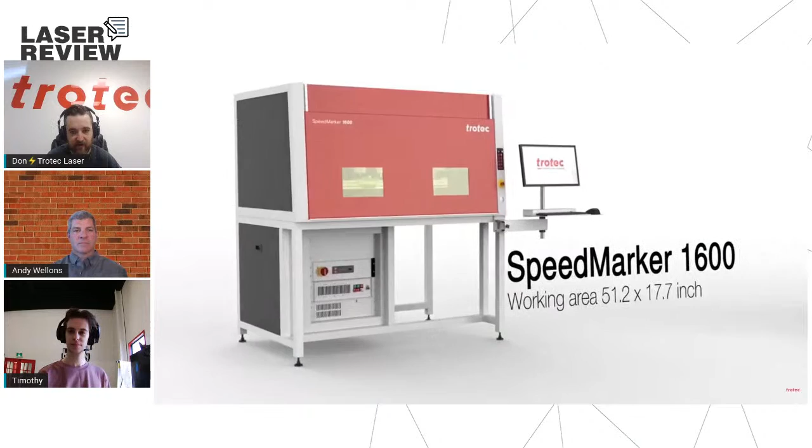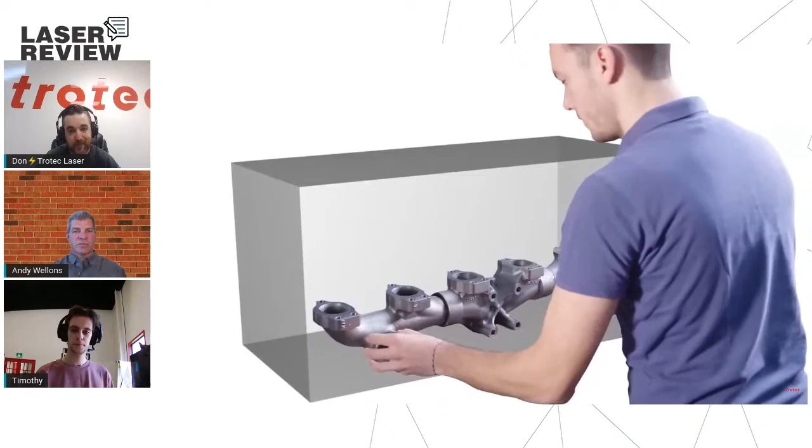Specifically in industrial type applications, so principally in fiber optics, kind of the metal marking sort of areas, I would guess. Yes, definitely. Anything from fully integrated systems to our standalone workstations. Oh, very cool. Have you gotten to be a part of some custom installations for Galvo machines and things? Yes, quite a few over the years, from simple to very sophisticated major inline marking.

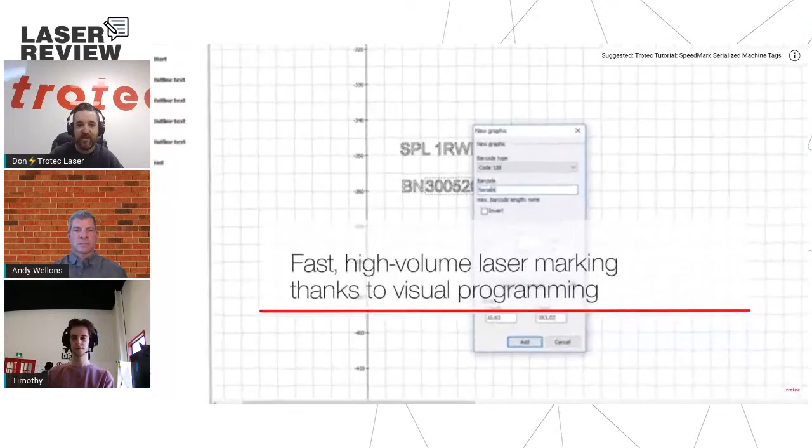Oh, that's cool. That's something I'd love to ask you more about. So this is something we don't often get to talk about, but the Galvo machines in particular have this great facility to be integrated into any number of different unique placements, and particularly, as you're seeing here on the screen, the Speedmark software is so flexible that it allows for all manner of different applications.

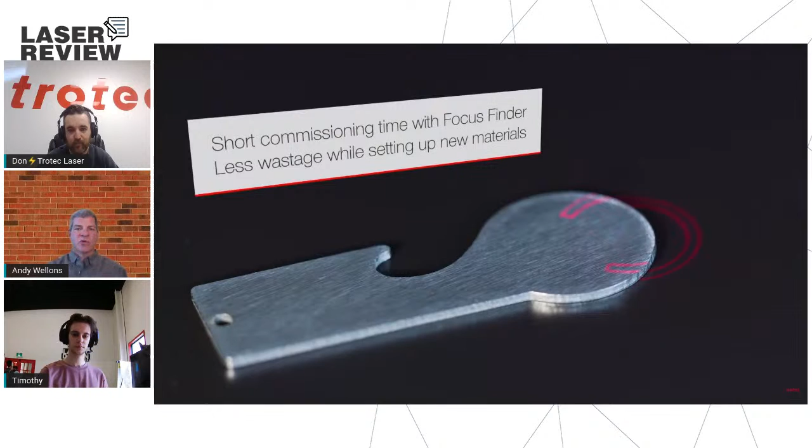I think you said specifically you were interested in industrial marking. Would it be the sort of things we're seeing here in the video, like barcode marking, scanning, that kind of thing? Yeah, definitely. Part identification and traceability has been a big part of that, and that can be anything from human readable part numbers on parts to 2D or QR codes that are read and then kept track of through the manufacturing process.

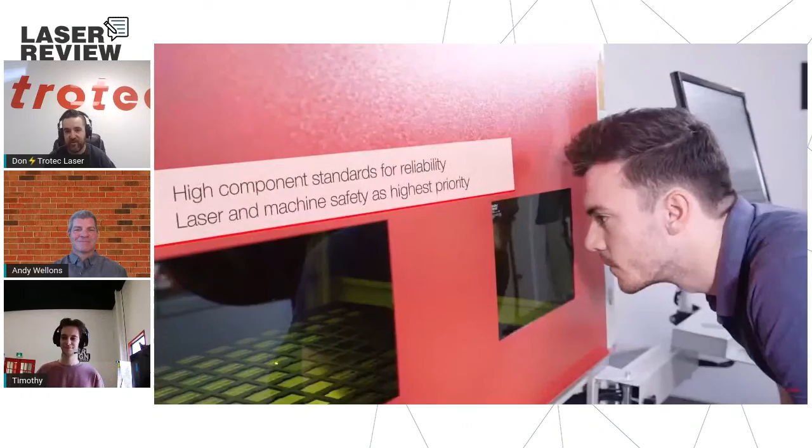Very cool. I was very fortunate this week to attend FabTech here in Toronto with Miguel, which is why I'm joining you once again from the Ontario office. We got to meet with a lot of great customers this week who do exactly what you're talking about, that traceability aspect. And it's still, when I think of industrial marking, my mind goes specifically towards a couple applications in particular. But the things people are doing these days with Galvos is so widespread and impressive.

I really have to redefine what I think of as a typical Galvo application. Tim actually is going to be doing some pretty cool stuff for us this morning. He's prepared something very interesting, I'll take the heat off of Andy really quick. Tim, do you want to show us a little bit of this? How do you want to go about this? Do you want to keep it a surprise?

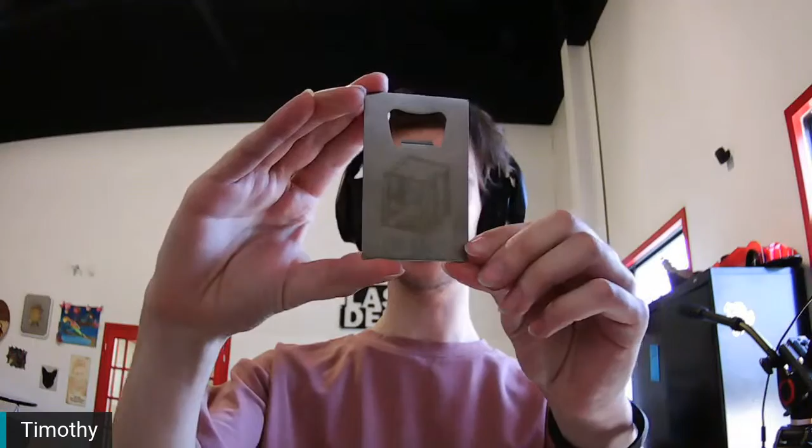I think what you have is really cool. I'll keep my own work as a surprise, but for now I'll showcase what I've been working on, just to show a bit of the Galvo's abilities. So here I have a black anodized aluminum card, just able to work with the Galvo on that. I'll be showcasing this today. The next thing we'll be showcasing is a bit of a fan favorite in my opinion, been taking it to a lot of shows - a little bottle opener with a blueprint of the Galvo machine. Love this one, everyone likes a beer opener. And then the third one's going to be a little surprise, a bit of a pattern, a bit psychedelic. I like it.

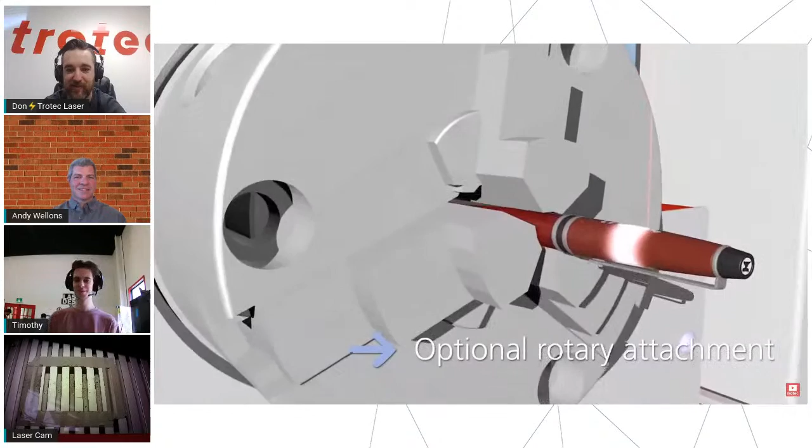I have to say, you joke about everyone loves a beer opener, but trying to keep those even in stock at a trade show was tricky. Yeah, I mean, I'll throw it to Andy, but it still blows me away. Even just getting to do pens in the speed marker for people at a trade show, it's incredible to see that personalization of a simple thing using this machine can bring about.

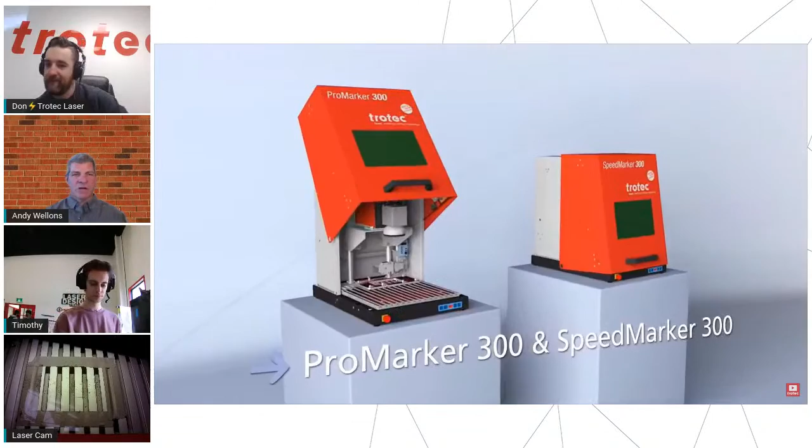Yeah, very impressive part of Galvo is the speed that it can mark - up to 10 times faster than a gantry flatbed system. So it can be very impressive to see personal identification that can be done in seconds. Can be very fast. Absolutely. I think people don't understand how fast, right up until we actually get to show it off.

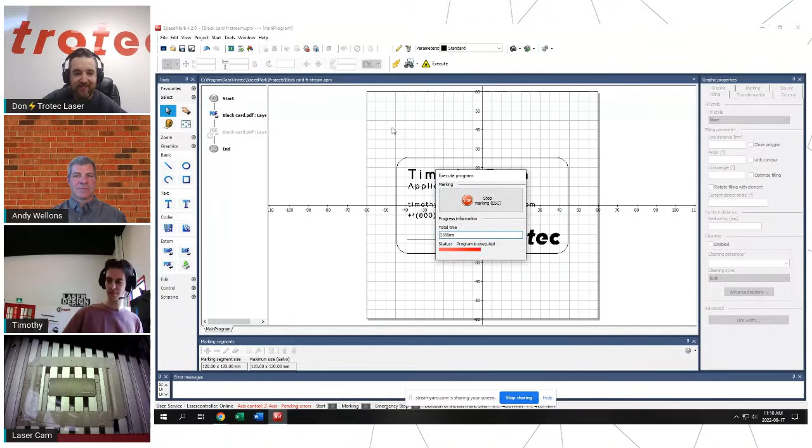So I'm going to have Tim get started on the marking. I have to say, I'm glad you're starting with something simple like the black anodized card, but don't think that just because it's simple, it won't be impressive. Oh yeah, definitely. I always tell people... so 10 times, you say, Andy. Wow, that's so cool, okay.

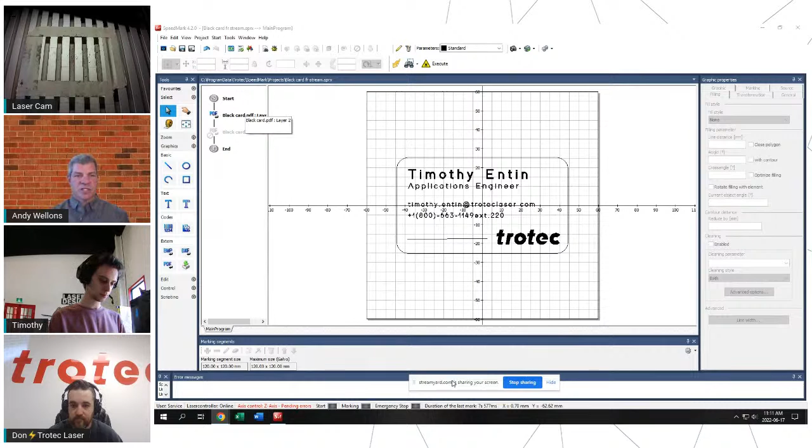And what we're seeing there on anodized, it can also be done with a CO2 laser because you're just removing the anodized surface from the aluminum. But with the fiber laser, which we're using at this time, a 20-watt fiber laser, it still removes the surface, but again, very much faster than a CO2 laser. And that's based on the wavelength of the laser, but also the method that the beam is moved with a galvanometer versus an XY movement. So a lot of advantage in certain areas.

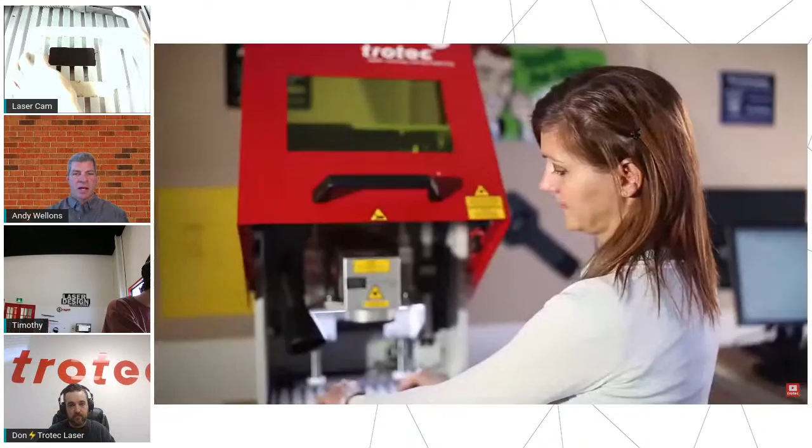Absolutely. I was going to ask, in your opinion, why would somebody interested in Trotec, but not sure where to begin, be looking at a Galvo laser as opposed to a CO2 or more of a flatbed system? For metal engraving, obviously with CO2, you can remove surface coatings like anodized paint. But as far as bare metal, say stainless steel, you would need to use a CerMark or some other type of material to get contrast on those base raw materials. With fiber laser, you can get contrast without any prep. So that would be one reason - if you need contrast, you can do that with a fiber laser without any prep. Also, as we mentioned, speed. A lot of industrial or personalization applications - if you need to do 10,000 pens and you can cut your time in half, it's a huge benefit.

Absolutely. But on the other hand, Galvo laser has a limited engraving area. It's a fixed head, so our standard lens is up to about 120 by 120 millimeter area. So if you need large pieces, sometimes the gantry or flatbed is still a great or better solution than Galvo. But whenever we're talking about a single piece that needs a quick or short cycle time, it's a big advantage.

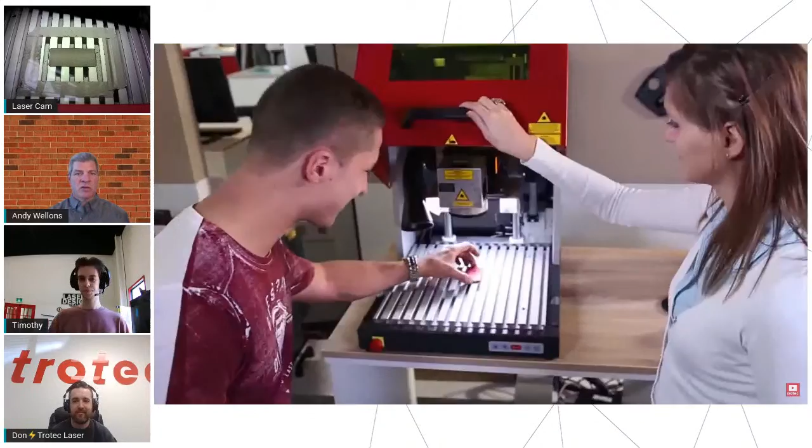I guess another thing to add would be very small, detailed engraving. With a Galvo laser, the beam diameter or spot size is considerably smaller than CO2. So you're able to engrave or mark very small, detailed graphics or characters with good legibility.

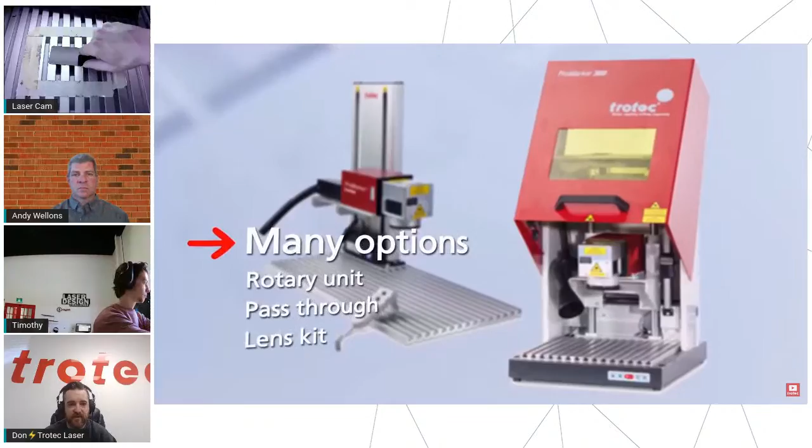Very, very true. And you could even see - Tim, I don't know if you can hold up that anodized card again to the camera - the quality of, as you pointed out, Andy, the quality of legibility and marking on that. There it is. Yes, always the toughest part of the stream. No, not at all. Yup.

Oh God, I don't know where it's going. It's all good, it's all good.

As you said, Andy, the level of legibility when it comes to on anodized, but then even as you showed on the bottle opener, Tim, directly onto an item like stainless steel - that is something that, by and large, when it comes to the flatbed systems, you struggle to mark. You can use CerMark or a marking compound like that, but it adds an extra step in production, or several extra steps that add to your production time and production difficulty, in terms of making sure you don't have overspray or that consistent level of CerMark on every piece. This solution adds a lot of ease to your production and takes a lot of stress off of your operators. It's just plug and play.

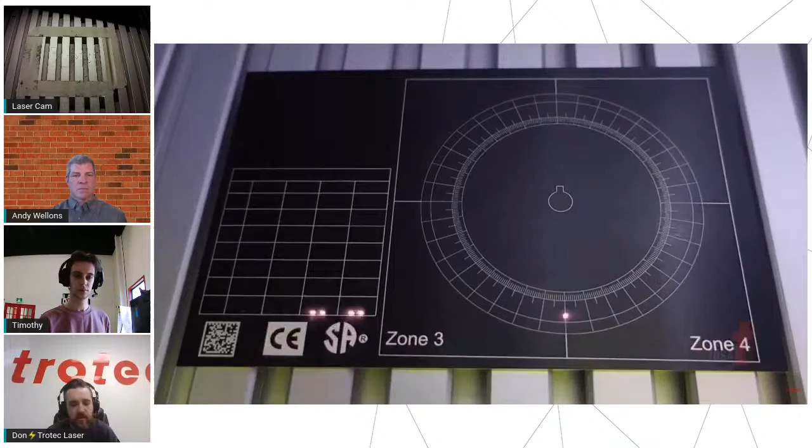One thing I wanted to ask you - when you install a Galvo, is the actual system entirely self-contained? It comes with the computer and everything, but do you need a separate Windows PC when you have the Galvo installed, or can you run it just with a screen? The systems do include the industrial PC in the workstations. There is an option to provide your own PC as well. You can use a laptop if desired - there's an Ethernet connection to the control rack of the laser. So there are options, but for a turnkey solution, we do provide that with an industrial PC.

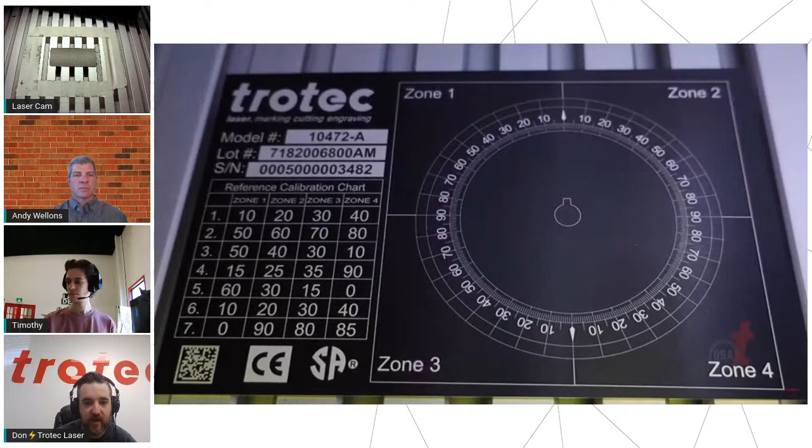That's very cool. I feel like we've started to talk a little bit about the customers who'll be looking at a Galvo, but I did want to, since Tim's got the bottle opener there, explore the other things people can think about with the Galvo laser. Andy, typically the first thing I think of is metal marking - stainless steel, titanium, aluminum, that sort of thing. But what are the range of materials a laser like this is comfortable working with if somebody's completely new to the Galvo laser world?

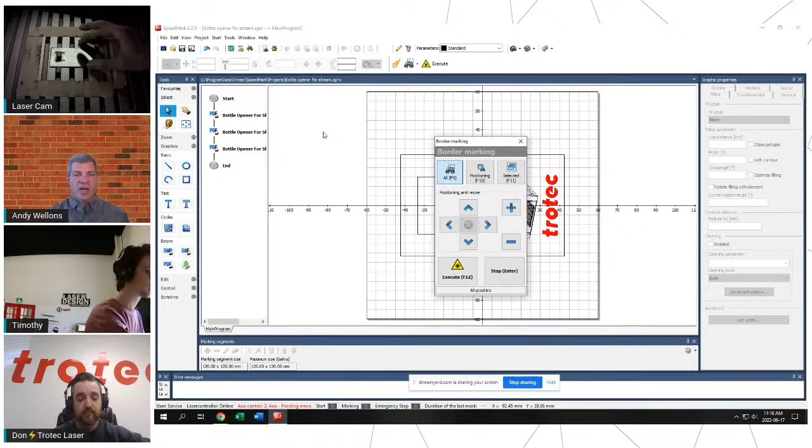Sure. I'd like to mention back to metal marking first - a huge advantage with Galvo is you can do deep engraving, which is very complicated and time consuming with a gantry flatbed system. With Galvo, we're able to go to an infinite depth through the way it removes material, but we can also do programmable Z-axis to optimize that engraving. We even have a tool in our software that gives you the ability to change the angle of removal and optimize the entire engraving process to get very clean, accurate, deep engraving.

But going to other materials - plastics. A great advantage with a fiber laser in Galvo is that with plastics you can get a contrast, unlike CO2 that essentially melts the plastic material. Fiber laser on a wide range of plastics gives a contrasted mark, so it's very good for identification of plastic parts. There's a wide range of other materials too - plastics, but also composite materials, ceramics, that type of thing. What a fiber laser cannot mark is organic materials - wood, glass, rubber, natural rubber. It does not react to the wavelength of a fiber laser. Anything else with a surface coating or composite materials has a very good reaction to that wavelength.

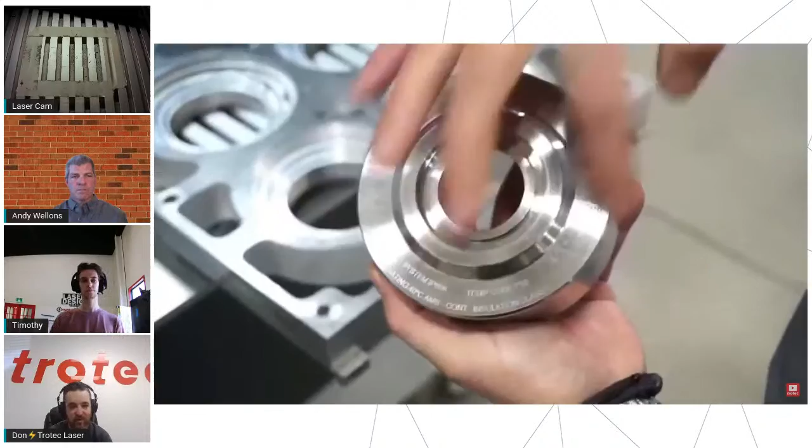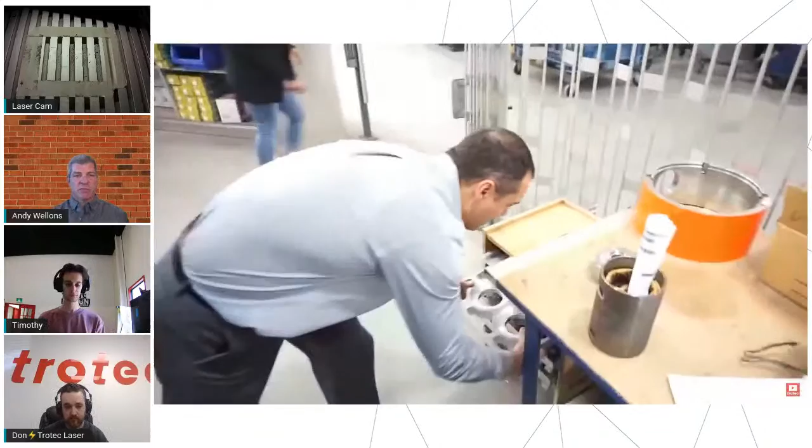One of the things we got a lot of questions about this week, and I'm sure you get asked all the time, is things like Yeti mugs - powder-coated materials. Those would fall into the same sort of anodized area - perfectly fine with the Galvo laser, I assume? Yes, powder-coated drinkware - we do have customers that remove that surface and do it quite well. It is challenging compared to CO2. CO2 is actually better on powder coating because it doesn't affect the base metal. With a fiber laser, you can effectively remove the powder coating, but if it's out of adjustment - say the Z position is too low - you can also affect that base metal. So again, it can be done, and it does quite well.

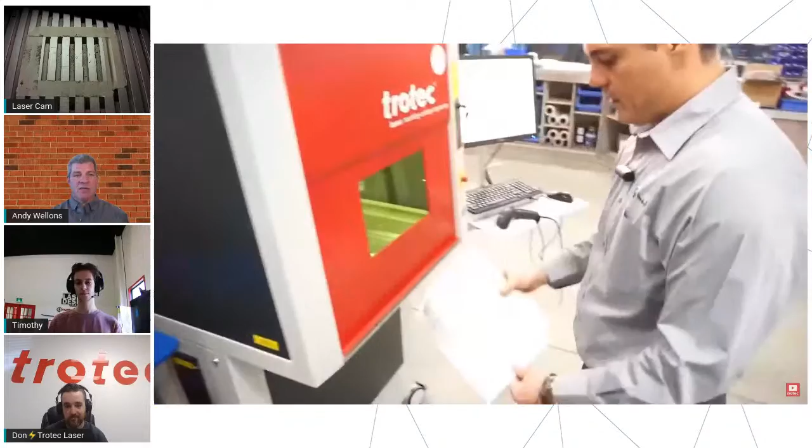The big advantage is the speed at which it can do it compared to CO2. We have options for 3D, which is a dynamic shifter on the Galvo that allows you to engrave around a curved surface without rotating it. It automatically adjusts for the curvature. So we have a lot of options for drinkware, and in some cases it can be a very good solution for powder coating.

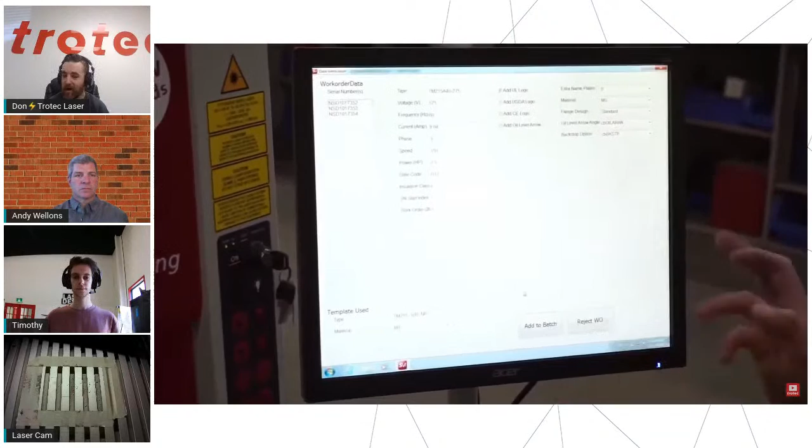100%, you make a very good point. This is something I mentioned at the show this week. I said, exactly as you said, if speed is your principal goal, it's a great solution. You saw how quickly Tim marked that bottle opener and how beautifully the mark turned out. But you do have to be really careful about the adjustment so you're not actually cutting into the exterior of your thermally insulated bottle.

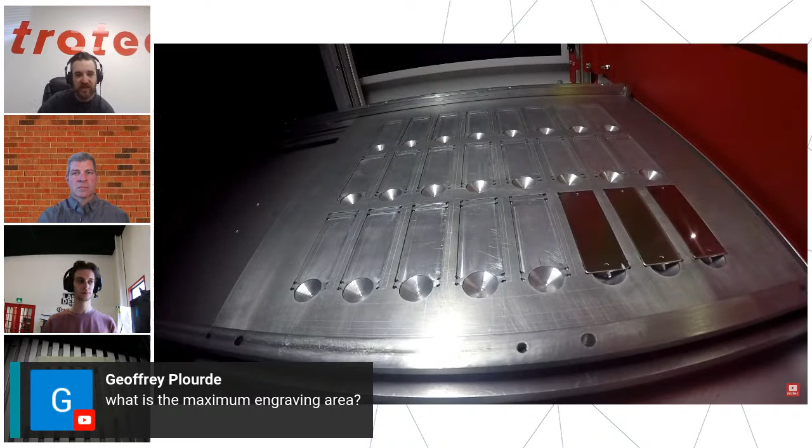We had a great question here in the chat that I wanted to pass by you. I believe you spoke about it before, but the maximum engraving area when you're looking at a Galvo machine - obviously it depends on the size of the Galvo - would you be able to give us a general range? Sure, we have options for the lens, the optics that are used with the system.

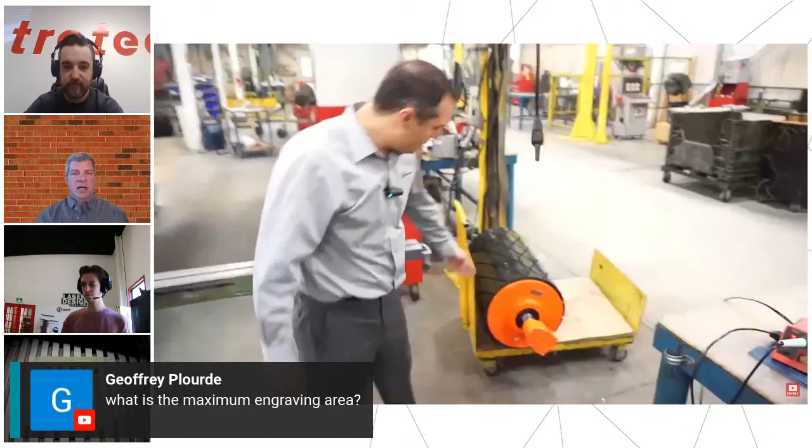The standard is a 120 by 120 millimeter marking area. That's our 160 millimeter lens. From there we go up to, can actually go up to 310 by 310 on the marking area. So anywhere from 120 by 120 up to 310 by 310.

But we also have workstations that have XY movement of the head that extends that usable area up to, going into inches, a 17 by 39 inch engraving area. So how that's done is it moves the head to different zones that cover that optical area that it can engrave in. Never worry about going into inches - I'm glad you did, because I still haven't been able to make the millimeter conversions in my head at all, I'm afraid.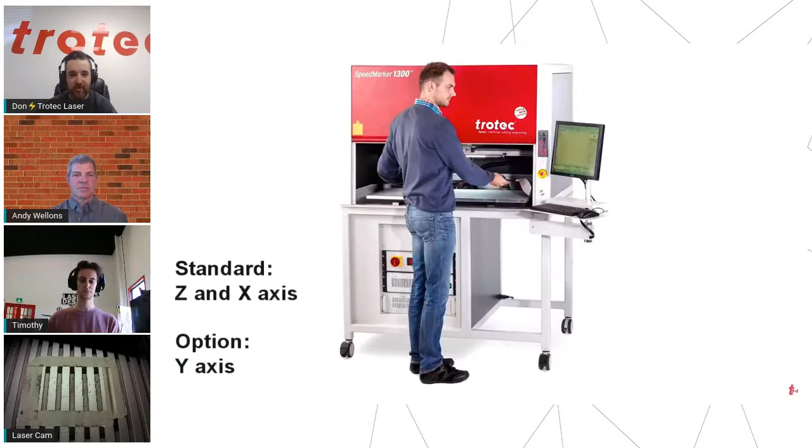So we will come back to Andy really shortly here. I want to hear more about his experience with the Galvo lasers, but Tim has actually prepared a really great top to bottom breakdown for us. We're about 15 minutes in here, so I figure it's a great time to maybe pass it over to Tim. What do you think, Bud? Are you ready to walk us through some of the speed marker basics and stuff?

Oh, definitely. Thank you, sir. Take it away. So SpeedMark, just like all of our other softwares, is very intuitive, simple to use, and I'll make sure to walk through it to the best of my ability today.

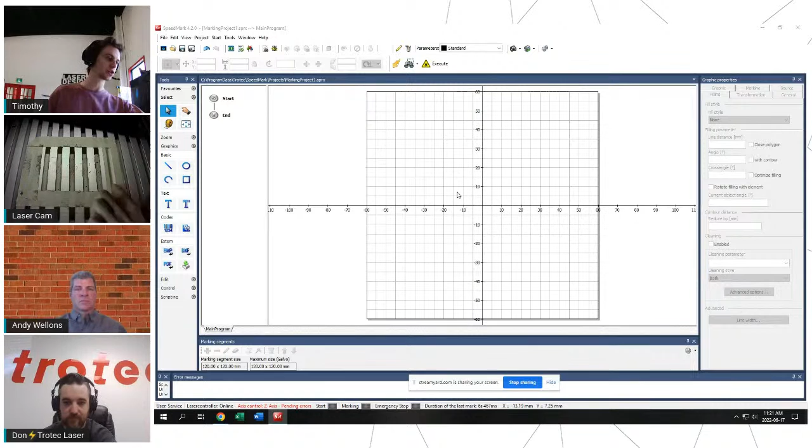So right now on my screen I have a current existing project, but I'm going to start a new one for you guys. I'll go up to the top left corner, press on File, open up New Program - I'll make changes to my current file. Here I am presented with a blank canvas. As Andy mentioned, this is a 120 millimeter by 120 millimeter canvas that I'm working on. On the actual laser, I also have tape to outline the working space, just so we understand a bit better the space we have to work with.

So working with the software, if you are familiar with our software Ruby or Job Control, we have very basic graphic design details. One of the first things I like to point out are basic elements such as the circle tool. We also have the ability to throw down simple shapes like squares, and we could edit the scale of these shapes, change the dimensions, and unlock and lock the proportions as we go.

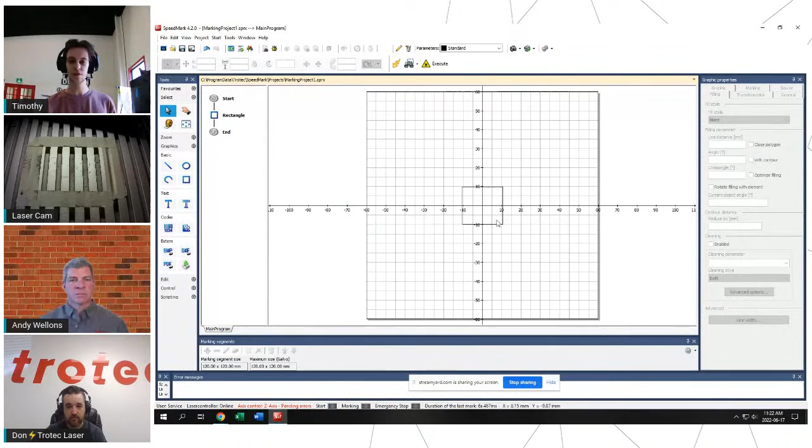We can also remove these objects, and if needed, we could right-click on the object, go all the way down to Align, and select Zero Point. This will make sure that our object is perfectly in the middle. So instead of placing it and trying to move it around, we have a perfect precision tool to make sure it's perfectly in the middle.

Some of the next options we have are also adding in text. So we could drag a text box in and start typing up our own customized text. We also have a ton of fonts available - any font that your computer has and recognizes will be shown in the software too. So if you have downloaded customized fonts, don't worry, the software will see it. For this example, we're going to use Little Band Script, and we're just going to type in 'Trotec 123' as a simple test.

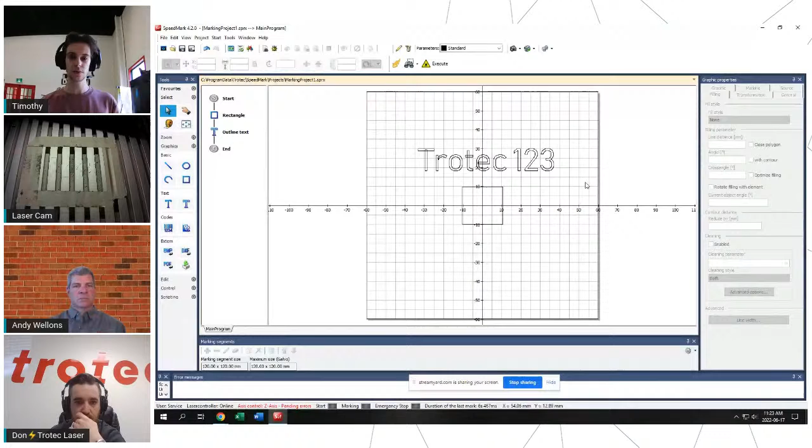So here we go, here we have our text. Now one thing you guys might notice is that all of these shapes and objects I'm putting in are put in with no filling. This is because we have to put in our own fill on every project that we put into SpeedMark. So to get around this, I'm going to click on my text here, select it, and move over to the right side of my screen where it gives me the option for filling.

So in this tab here, called the Graphic Properties tab, we have 6 different options we can go through, but for the time being I'm going to focus on the fill. I'm going to head over to Fill Style, and I'm presented with 4 options: we have parallel lines, bidirectional, and then cross-line parallel and cross-line bidirectional.

Parallel lines will go, as the word means, parallel lines. Bidirectional will go back and forth. And cross lines, parallel and bidirectional, will mean the same things but create a cross line pattern as they're going. So a bidirectional pattern will go side to side, and cross line bidirectional will go side to side and up and down as well.

Can I interrupt you really quick, Tim? Yeah, for sure. So this sort of fill pattern, Andy, with what you were discussing earlier when you were talking about being able to decide the depth of marking and the way in which you'd like to fill out a piece, it was sort of like the cross hatching, I guess, is how I think about it, of the way the laser is going to move across the graphic.

Yes, depending on what you're trying to accomplish, you use a different fill pattern. For deep engraving we would usually use bidirectional, but there's also a deep engraving module in the software that gives you the ability to change the angle it moves across your graphic.

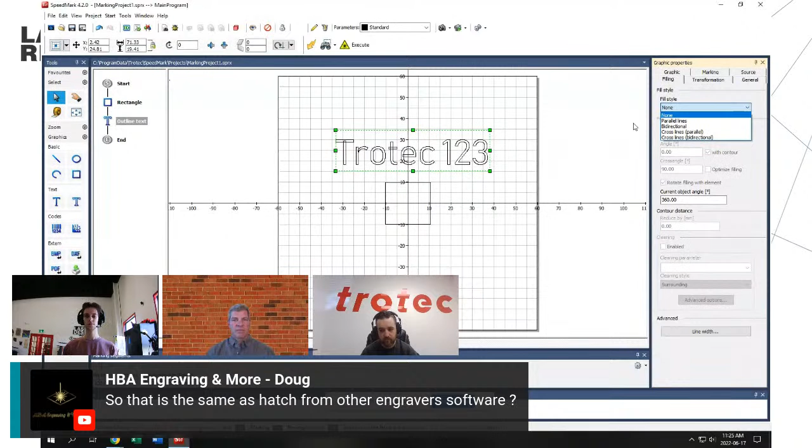But as far as the simple fill, say you're only doing an annealed mark or an engraving, some of this has to do with speed as well. Parallel lines are going to be very fast. If you do crosshatch bidirectional, then it's going to take longer because of more passes.

By the way, not a crude explanation at all. You're talking to Canadians, so any snowplow related metaphor is going to be 100% successful.

So a question here from Doug at HBA: is it similar to the hatching you might see in other engraving software? Sort of a similar kind of idea.

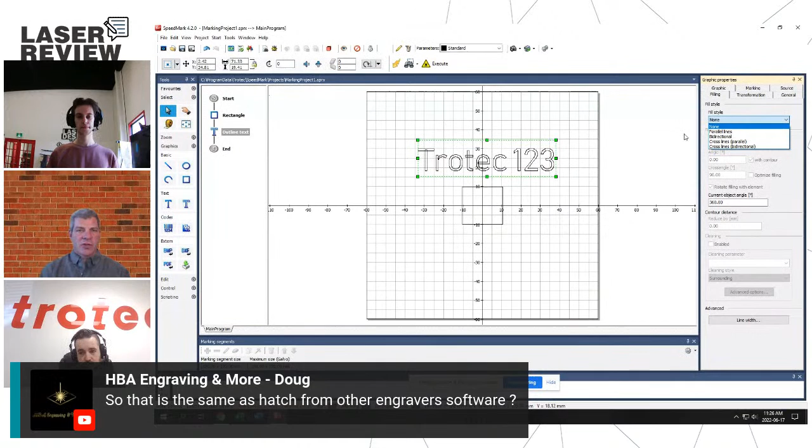I'm sorry, I may have missed that. No, it's okay, I was saying a question from Doug: when you were discussing, is it sort of similar to the way hatching would work in other engraving software, in terms of deciding the way the laser crosses across the graphic? Yeah, definitely, it's the same concept - you have fill, and you're using lines to fill that object.

Makes sense. So I have to say, you began to touch on it there, but I think, Tim, the next thing you were going to talk to us about is kind of a cleaning pass, a way to go through. Please, sorry to interrupt. Oh, not a problem at all.

So for this fill style, I'm going to fill in using parallel lines. There are also different filling parameters before we get to the cleaning pass. So we have line distance - this would be the distance between every filling line that you're trying to place down. By default, at least my software here defaults to 0.1 millimeters.

I like to set it to 0.05 just so we can get a tighter squeeze for all the lines, a bit of a cleaner finish.

The next options below would be to change the angle of the lines. Right now they're set perfectly horizontal, but we could always change the angle a bit. We could also zoom in to the actual numbers here to see the lines we're putting in. If I change that to 0.1, you can see I have fewer lines now.

What's really interesting is that in this area I could also change the contouring, so I can close the polygon. Again, with the angles, I can leave the contour on or off. The software will see the contour of the letters I'm working with, and I could easily turn that off as well.

The next section would be the cleaning pass. This is a low power run pass that just cleans up the surface and makes sure everything is nice and tidy. The way we set up a clean pass is by heading down to the cleaning section and enabling this check mark.

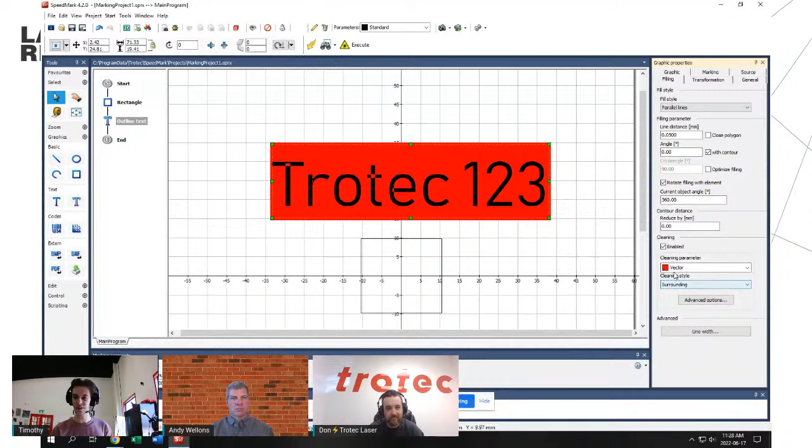You may also notice it's cleaning everything outside of the word, not the words themselves. That's because my cleaning style, right below the cleaning parameters, is set to surrounding. I could change this to both, so it cleans the contents I'm making plus the surrounding, or just the contents themselves. I prefer to clean only the contents because it gives a cleaner edge.

At the same time, I can also change the line distance for the cleaning passes, right below in the advanced options. When I click on that, a dialog box pops up, and just like in the fill style and fill parameters, I could change the type of line style for the cleaning paths, selecting bidirectional or parallel lines, and cross line options as well.

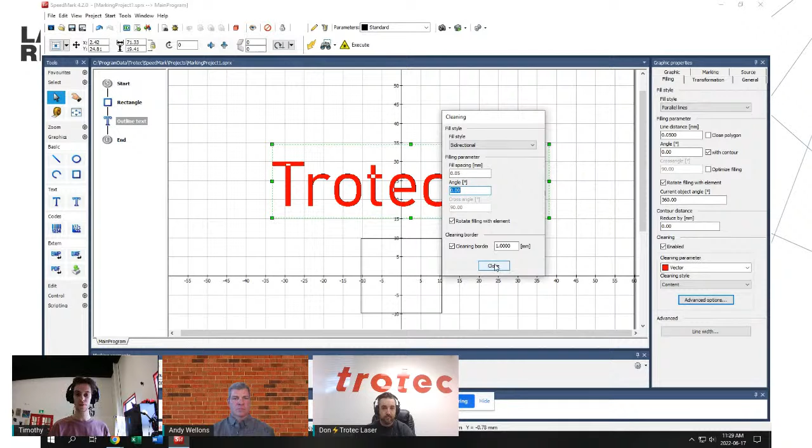I can also choose the spacing for the cleaning, so I'm going to set it to 0.05 again. I can also change the angle and the cleaning borders of everything too. After you're done, you just press close, and now you've set up a cleaning pass and an engraving pass.

I'm going to be doing this on some black anodized aluminum as well.

After I'm done setting everything up, I have the project here set up. I'm going to go into my marking settings, which are back up here in the graphic properties. I click on marking settings, and I'm given my material parameters, which I don't think I changed.

For the sake of this project, I'm going to change the materials to my project materials rather than the material database. Once I do this, it will change all the settings I previously made for the cleaning pass, so I'll go back and select the cleaning pass again, go back to my marking settings, and make sure everything is selected under my standard settings. It's all set to the black layer.

Now I'm more or less ready to start my project, but not just yet. I'm going to try to get rid of the square, but I don't actually have to delete it. Speedmark allows me to click on an object and simply deactivate this layer, so I can either decide to have this engraved or completely skip through it.

A great use of that feature is you can actually import a drawing—say you have a pre-manufactured plate or tag, or maybe you're engraving pens. You can import a drawing of that, deactivate it, and yet let it still be visible, so it gives you a visual of what you're marking on. You can do that with any item in the list, deactivating it or making it visible or not visible.

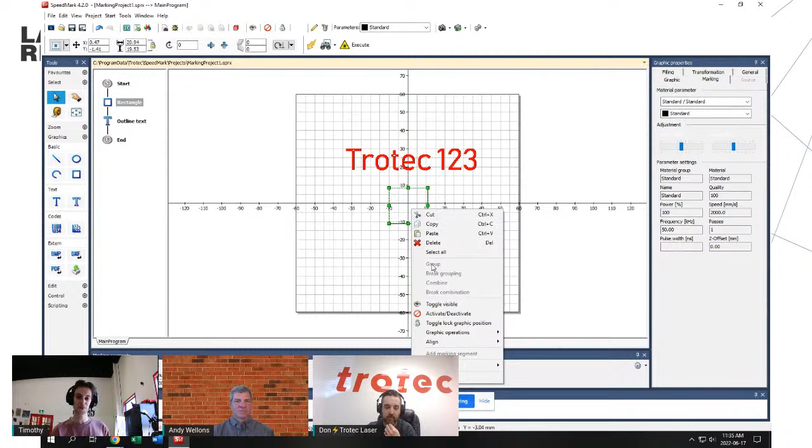So let me just get back to it. If I were to click on the object that I want to deactivate, I can either right-click on it and select activate/deactivate, or when I click on the object, I could also go up top here and select this button that says activate deactivate, and that'll deactivate the layer.

Now it'll still show the object in place there. The only way I'll know that it's deactivated is on my tree over here for the program tree. It'll show that my rectangle is all grayed out with a little X on it saying it's deactivated. So now the only area that I actually have that will show off in my marking is the Trotec 123.

So the next steps I'm going to be taking is creating the settings that I need to be able to mark or simply engrave on my anodized aluminum plate here. To do that, I will select my project materials, because before, when I went into my marking settings, I made sure that my material parameters was set to project materials and not my material database. So the pencil icon up top of the page is the project materials, and the can of pencils and stuff is the material database.

I'm going to press on project materials. If you're familiar with our software job control, this is where you'll find the 16 different layers of colors that you can use to choose different styles of settings. Let me click out of this, because I need to make sure that I've set my cleaning pass correctly. I have, and I've set it to my red layer. So I'm going to open up my materials again, check mark my cleaning pass for the red layer, and now I can play around with the settings here.

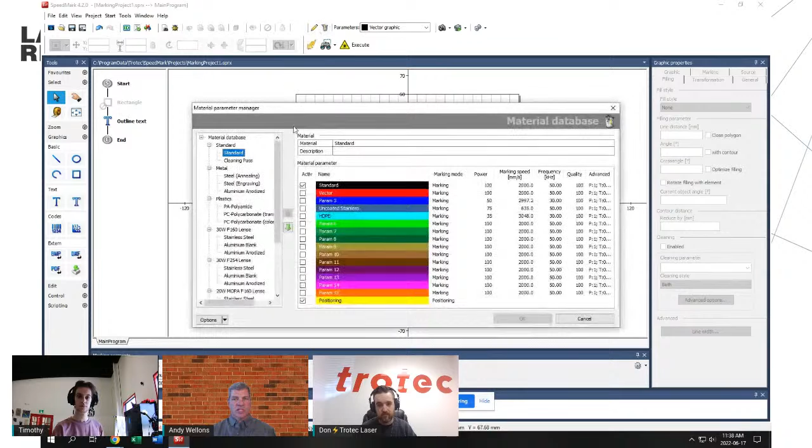Definitely. In the material database, you can create new materials and edit materials. So say you try it and make a couple of fine adjustments, then just save it as another material name. You can also go into the material database and take over the material settings and then transfer them to your project materials as a starting point. So there are a lot of tools that simplify how you navigate through the material database and how you can save and create things. It's very open and flexible.

Yeah, I mean, I can see that for sure. Wow. And sorry, Tim, did you say 2,000 millimeters a second? Yes, just wanted to be sure I hadn't misheard that. Okay, sorry, no, yeah, 4 years later, and I still find that, okay.

Cool. Alright, so within the settings as well, you can change the power, the speed, the frequency of the laser. We could also go into our advanced settings, and this is where we could open up stuff like how many passes we want the laser to do, the Z offset of the laser, the duration, et cetera. So we have a ton of advanced settings here as well.

So just before I actually start the project, I do want to go over some quick details as well. Speedmark also has the ability to create serial codes. So if we ever need to have a serial tag, a QR code, Speedmark is able to do this. Right below the text options, we have codes, and if we click on codes and click on our working area, we can simply throw in a barcode information.

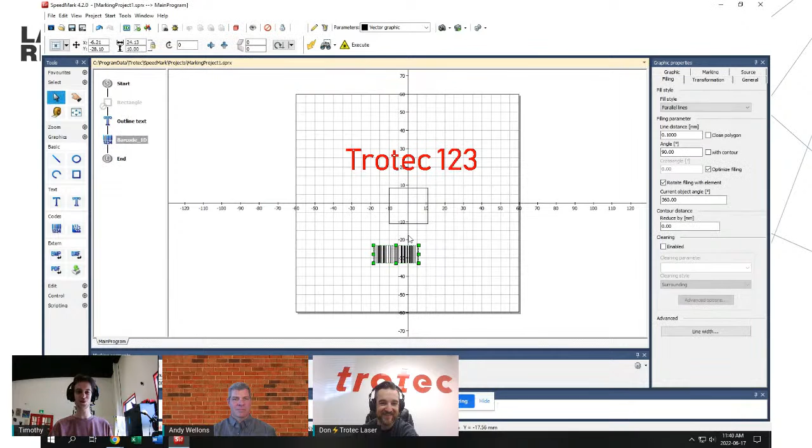So whatever information we might need in this barcode, for example... I'm not sure if that's how barcodes work actually. I think it might need numbers. I'm just going to put in random numbers and press add. Okay, we're just going to do the default one. So here we go, we've now thrown in a barcode.

And same thing goes for QR codes as well. Right beside the barcode button, we have a QR code button, and we can click on that. And with QR codes, I do know I could put in whatever text I'd like.

You could also use this as a hyperlink, presumably, or something like that, if you wanted to link this to a website or... Wow, and there we go. Now we have my code over here as well. So I'm just going to put this.

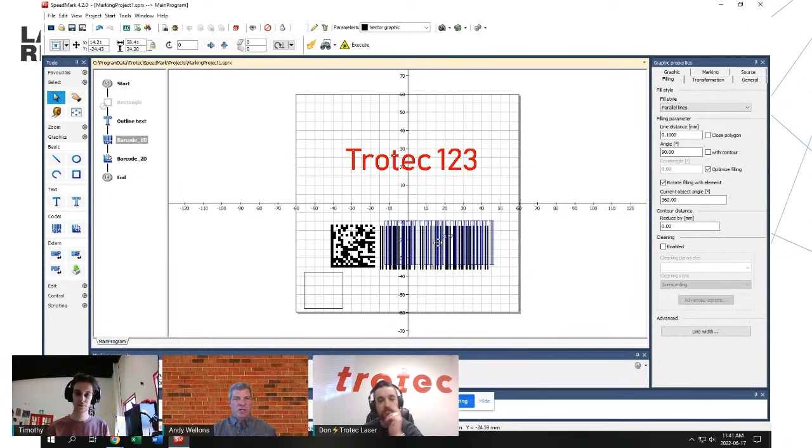So he's using the auto mode, which automatically creates a code that's optimal for the number of characters that you're embedding. You can also force it. So if the specification is a 12 by 12 QR code, you can go in and specifically limit it to that size. But the great news is Speedmark has automatic code generation, so if you don't have a specification or you're not familiar with them, as Tim just showed, simply type in what you want to be in the code and it automatically builds it for you.

For anyone who's less familiar with QR codes, the majority of smartphones today with a camera can very easily interact with a QR code. This is something you can incorporate into your marking for serialization or identification of parts pretty easily. I assume this is also able to pull data from an Excel sheet or some of the other functionality that I know Speedmark is capable of.

Yeah, you can extract data from a CSV file or an external database, so a lot of tools to import data or images. So I said, best kept secret—this software is so great and so powerful.

Okay, Tim, forgive me, I'm sorry, I get all excited. Oh, that's not a problem at all.

So below the codes, this is where we have all the external importing options. As mentioned before, we have BMP, DXF, and PDF. When you do so, you're prompted with a little option, and we could select the source. This is where we could choose almost any project that we need. So I have all the projects that I have for today's stream set up here.

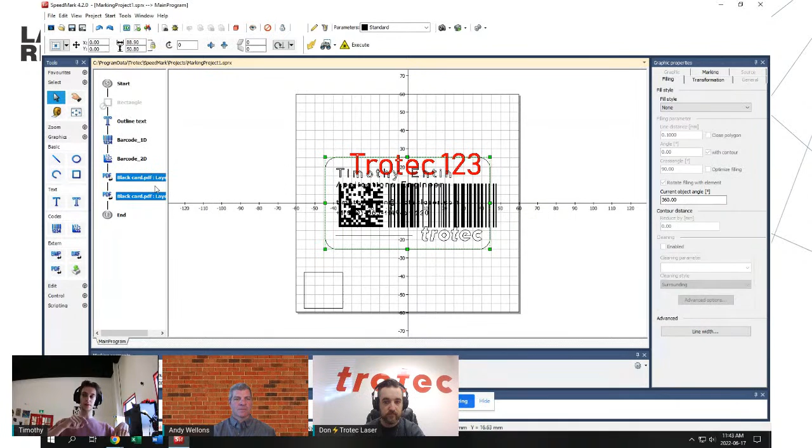So if I want to select multiple objects within the working space, I can press down on Control and mouse click on the objects that I want to move. And just like that, I'm able to move both objects that I want—I have them right here. As you can tell, you can also group those together now. If you right click on the two highlighted, you can group and ungroup. Oh, perfect, that makes everything much easier. There we go, perfect, sweet.

So as you can tell, when I imported this PDF, I don't have any filling on any of the letters that I've imported, which means I would have to put in the filling.

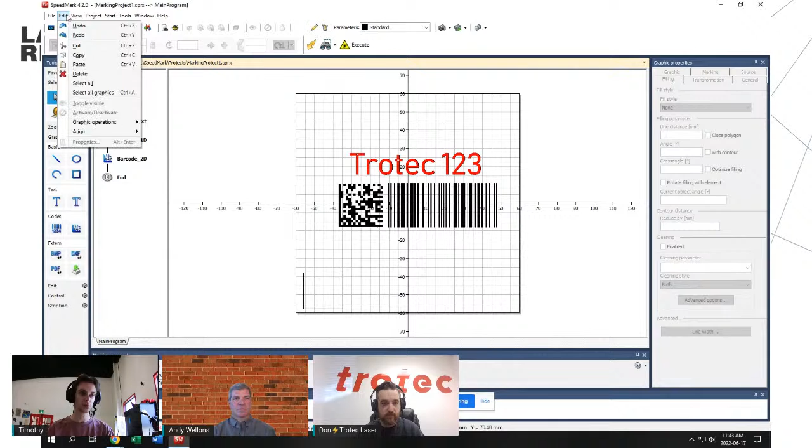So I believe if I ungroup everything—just because, oh, it just disappeared on me—we're just going to redo, and break the grouping. I like to break the grouping because I'm using the outline of the shape to align everything and use it as my sort of virtual jig. Then the rest of the file, which I can select in the tree here, is seen right in this area.

And this is where I could go along and fill the area. Now I have a filling on each of the characters I put in, and just like before, I can simply deactivate this so it's not shown in my marking, just like that.

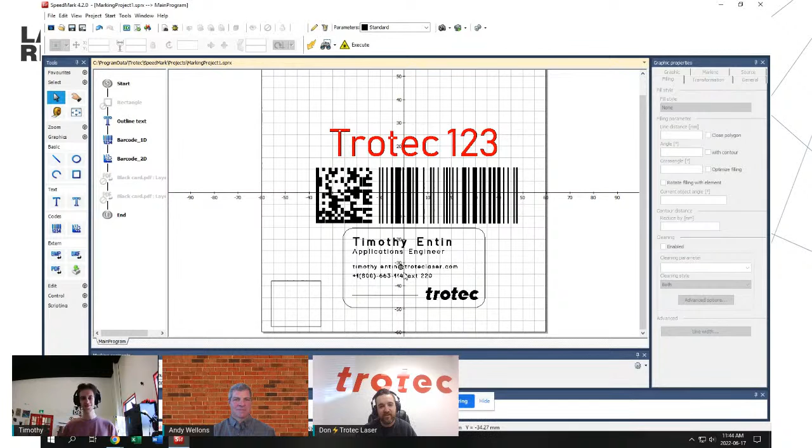So you mentioned the tree, and I can see you interacting with it, but what does that represent? Is it a workflow indicator for the laser or for the user? I believe it's the order that it's going to do the projects in. Yeah, that is correct.

And it's not always a marking or engraving step. It can also be programs, sub-programs. You can use move axis commands. So it's a flow of the entire process.

And you can grab one of those items and simply drag it below another and change the sequence or order of engraving. In terms of optimization, that was something I struggled with at first, optimizing things like cut lines and the order in which something would engrave or be cut. This really gives you the flexibility to do that.

It really is just a visual representation. If I'm reading it correctly, it's sort of, we're going to do this piece and then this piece and then this piece. And you're saying you can also factor in things like a Z-axis offset or other parts of the workflow that the machine can do. Right.

So I'm just adjusting everything so I can fit it onto my business card here. Make sure everything is nicely aligned. Don't leave off the barcodes, they're very important.

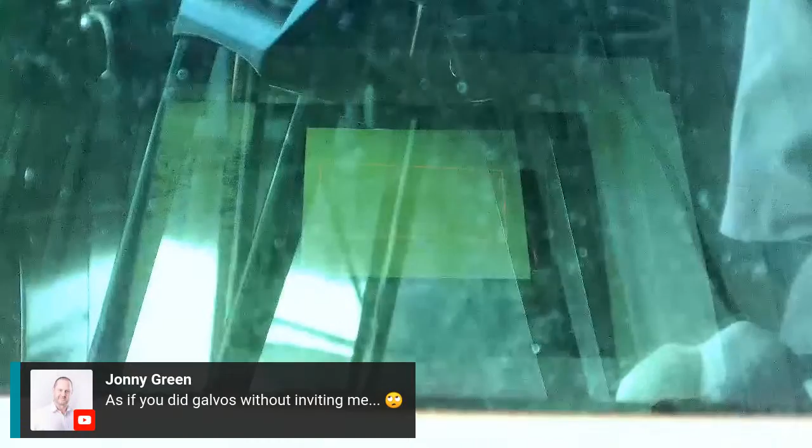Here, let's see if I can close the lid, will it peer through a bit? Oh no, my hand gets in the way. It's just barely there. So that red square is showing the working space where I put Trotec 123 and both of the barcodes.

So F9 will show every active field on the actual laser bed itself. F10, let's say you want to move something into a certain position, F10 will help you lock something in a certain position. So if you've placed an object ready and want to keep interchanging that object in a certain jig, you can use F10 to lock that positioning.

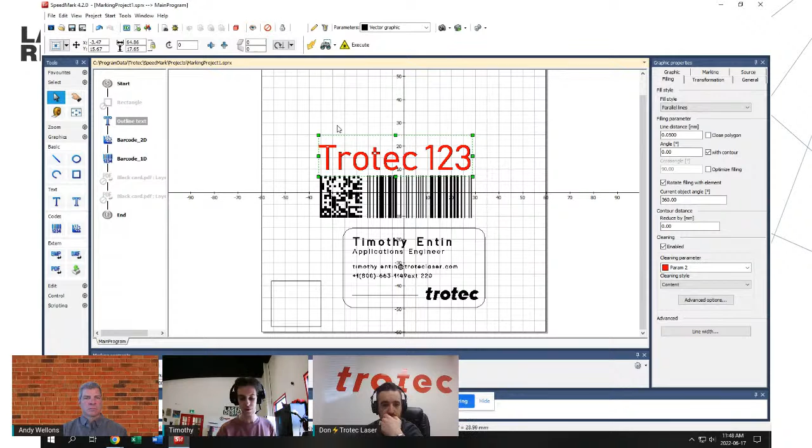F11 is the selected tool. So if you have selected a certain object that you want to showcase where it is on the bed, you can first select the object in the laser bed. So if I were to select Trotec 123 and then press F11, it will only show me the selected area of the Trotec 123.

So now I'm going to go back into F9 so that it will show me the entire working area. I'm going to remove the sticky note that I had placed down there - very important step, I might add. I'm going to turn on the lights again. And then our execute button, which is our F12. In case of emergencies, escape is always to stop. So now I will start the machine.

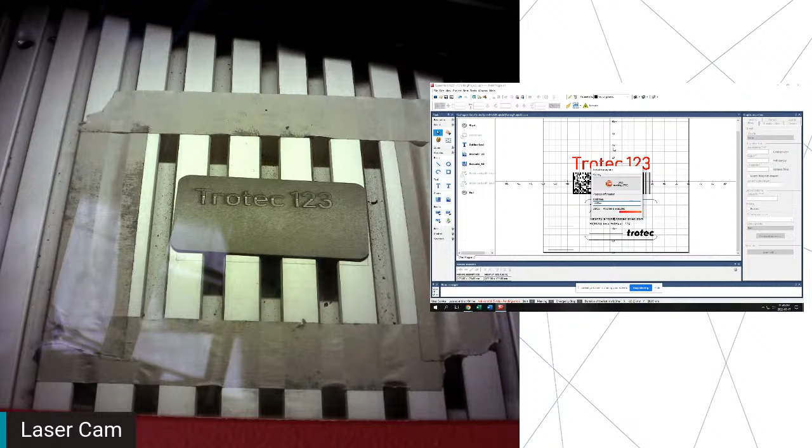Quickly run through that - it's going to go through a cleaning pass. And then we're done.

Wow, you really can see the difference in the area that the cleaning pass went through. What a difference seeing that in the barcodes.

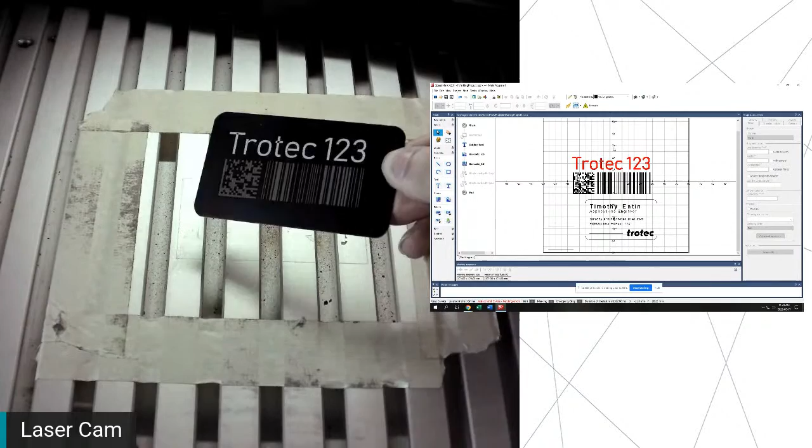And with the F11, it's a real-time representation of the positioning, so you can use your movement buttons to move it to a new location and then save it. So it's great for positioning, initial positioning, or changing the position at any point.

So if your marking area appeared to be slightly askew, you could use the arrow keys on the laptop to realign it to precisely the spot you were looking for. That's a nice feature.

You mentioned jigs, Tim, and in the beginning videos Lev was showing, jigs appeared to be a really important part of marking with the speed marker. I assume that's something you'd suggest for most customers, particularly if you're doing quite a number of items at once. Definitely.

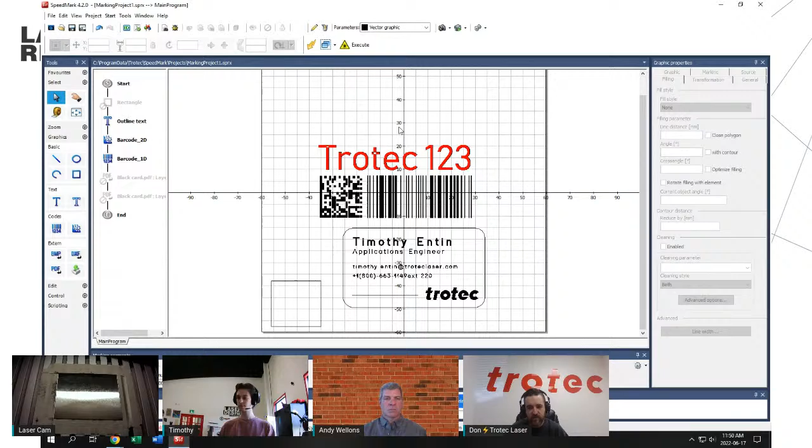I actually still have my old jig here. This is a jig that I made, I believe for a stream about a month ago with James. We were marking on different types of materials - a business card, a dog tag, a door tag, and a pen.

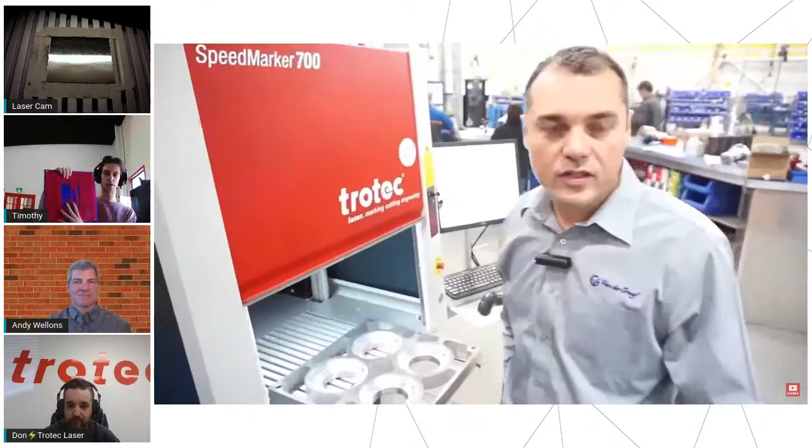I had put all 4 of these files into my... sorry, my microphone, did it mute? No, you sound good. Okay, alright, so we put 4 different designs onto my plate here in Speedmark, and I had placed 4 mounting points onto these sheets of acrylic.

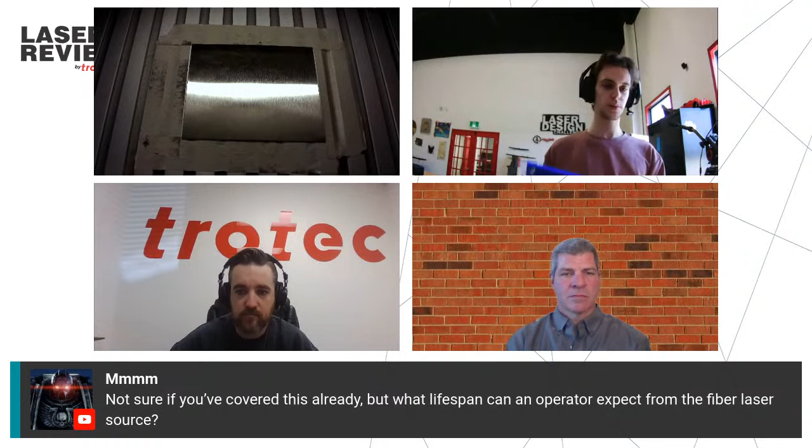I used simple bolts so that the plate itself, this jig right here, can mount into the 4 mounting points on the Speedmarker's plate. The holes, I believe, are set 16 centimeters apart. I was able to get the jig all mounted up perfectly in place, and then using the Speedmark software, I was able to align and position everything perfectly and start the jobs.

And they all got done in one go. I believe it took 20 seconds to get all 4 of them done. It was incredible. If you want to check that out, the stream's still up on our channel, it's definitely worth a watch, please go check it out.

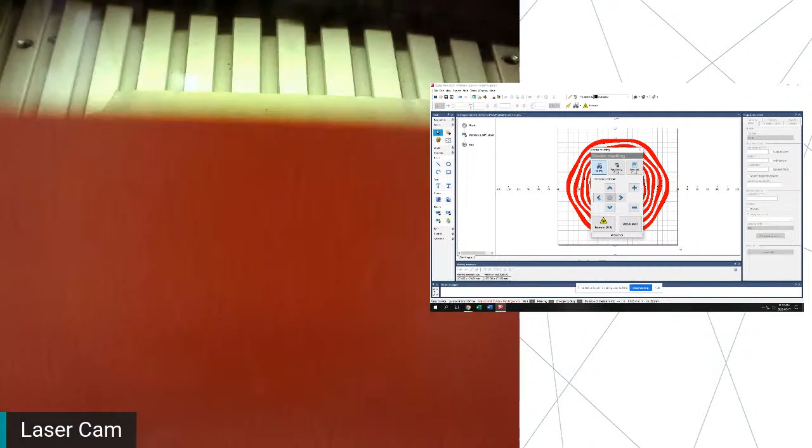That's huge though, because as we were touching on earlier, these lasers, when you're talking about an industrial setting, you're talking about marking a lot of pieces at once typically. One of the biggest advantages of the speed of a machine like this is the ability to do 100 tags, 1,000 pens. So knowing you have that facility, not only the speed to do it, but the capacity to do it for the next 10, 20, 30 years is just that much more of a selling feature, I would imagine.

Yes, exactly, thank you Johnny. Fiber lasers generally last until the heat death of the universe. I like that, yes indeed.

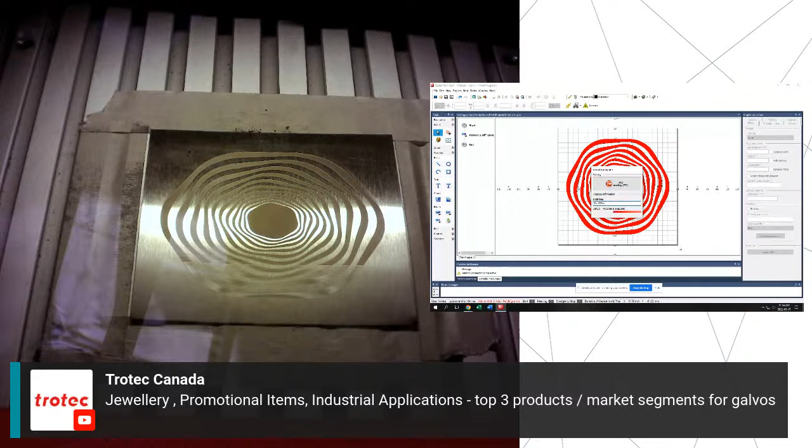I really think this incredible file that Tim has here is so cool - it's just to showcase that no matter what you'd like to do with this laser, it still has an incredible capacity. That's a great point. Jewelry, promotional items, and industrial applications are probably the top 3 market segments.

One question I'll throw to Andy, since I like to ask our Galvo experts: if somebody has a flatbed laser already, why might they consider adding a Galvo laser to their lineup? Some reasons we discussed earlier are quicker cycle time, and deep engraving - if they get a project that requires deep engraving, you'd need a Galvo for that. Also, a lot of our customers with Speedy systems only have CO2, and they have customers come into their shop bidding on jobs that require direct metal marking.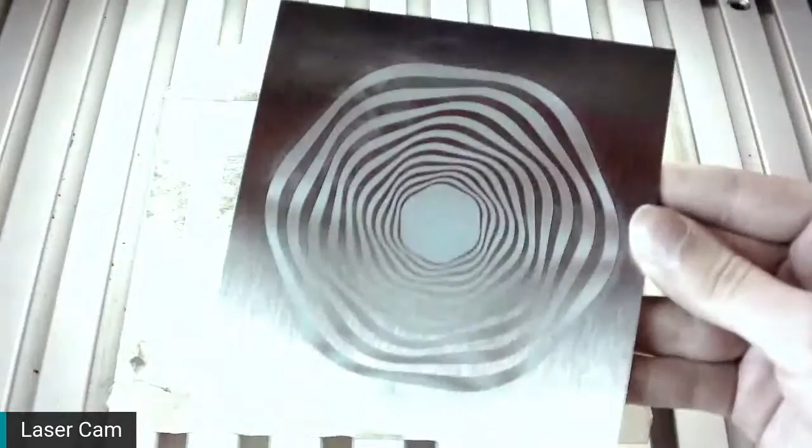The best way to do direct metal marking is with a Galvo laser. We do have fiber options in our speedy systems as well, but they're somewhat limited - we can't do deep engraving, and it's slower speeds, but it can be done. So there are a number of different reasons, but typically the major ones are cycle time and the need for the capabilities of a Galvo laser.

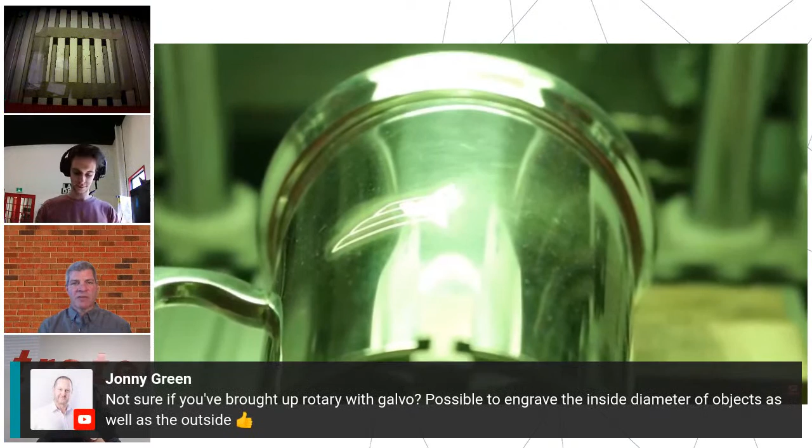Absolutely, we have a lot of customers that expand for that reason. This is exactly what I was going to say - for any general engraver, this opens you up to a whole new realm of different types of promotional items and personalization that with a CO2 laser would either be far more difficult or just not possible.

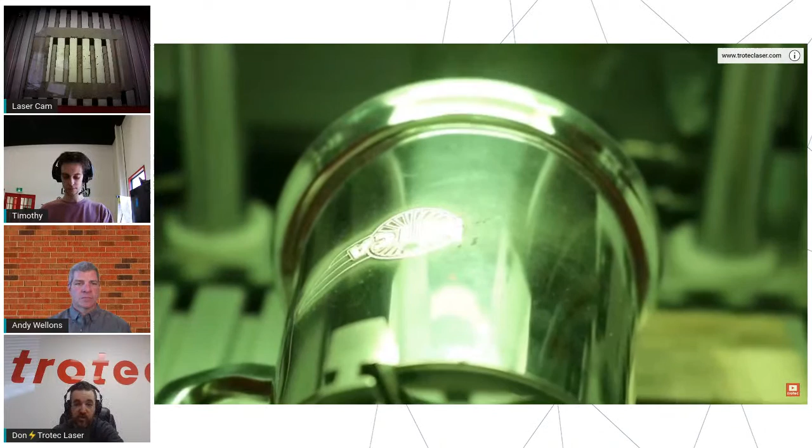Jonny makes a good point too, which is also the addition of a rotary - we have rotary attachments, and Tim has it there.

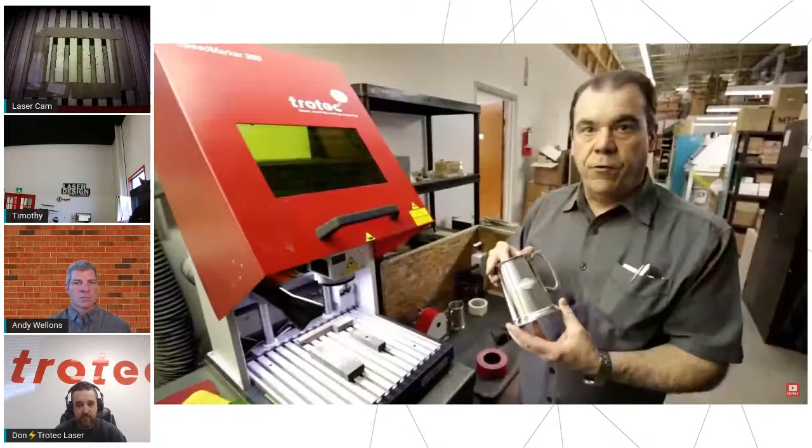We've touched on this in the last few weeks of streams, and we're looking to put together perhaps a rotary-only stream coming up soon for the Galvo machines. Andy, is it fair to say that encompasses a really big segment for these machines - rotary marking on drinkware or any circular item, especially in the jewelry industry? We have ring chucks specifically for rings, so yes, precious metals - we have a lot of customers engraving on those.

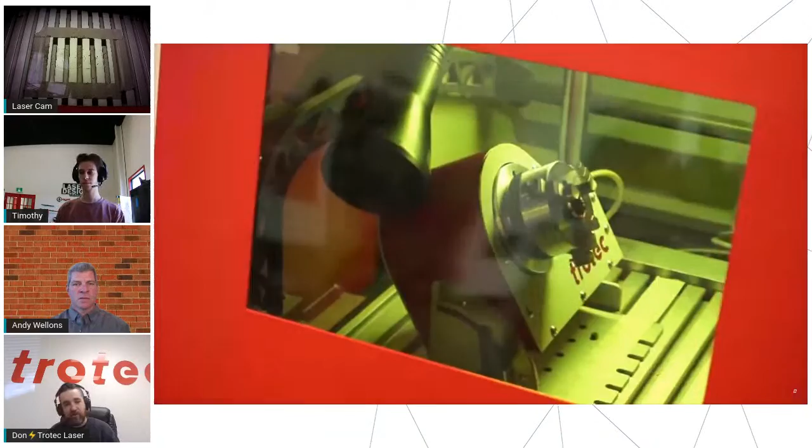We didn't get to touch on it too much, and I know it's a forthcoming stream, but you mentioned some of the DS machines and the 3D marking that's possible. Can you give us a general overview of what the future looks like for these Galvo machines? Just because Ruby is being introduced to Galvo machines, I'd encourage customers not to sleep on all the cool new stuff coming up, because they are expanding at an incredible rate right now.

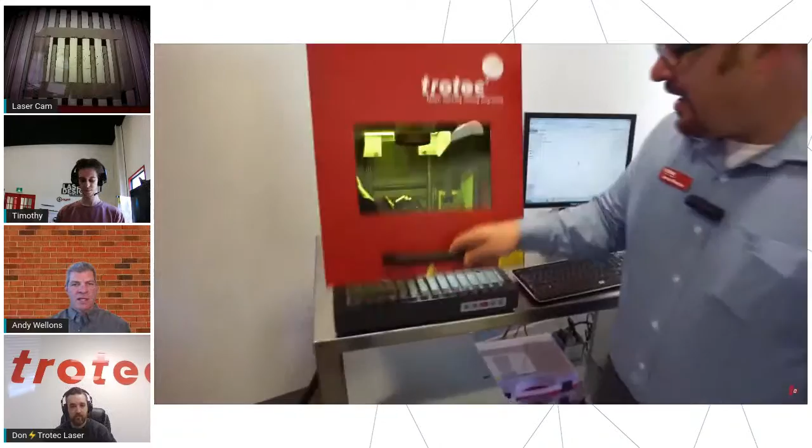The DS option, which is dynamic shifter, gives you the ability to change the focal distance to engrave around a curved surface. A quick description: say you need to mark around drinkware, but you don't want to use a rotary - you want to keep it on a V block and not rotate it.

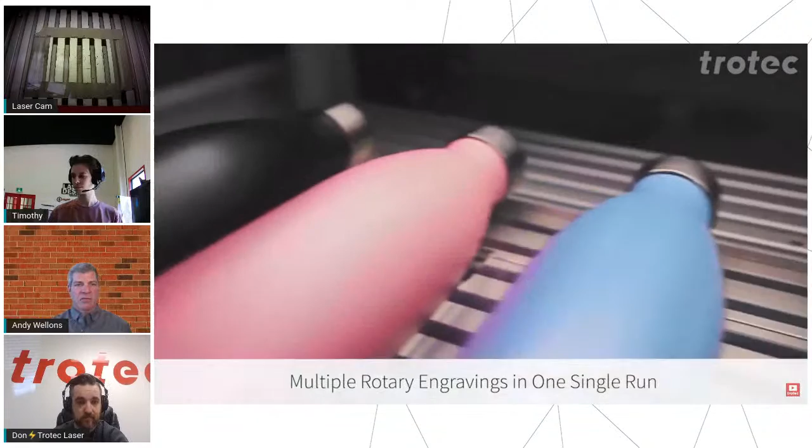It takes the graphic you want to engrave on the drinkware, and you put in the measurements - the diameter, the X and Y position, and the Z height - and it automatically calculates where the Z position needs to be to wrap it around that object. It's all automatic once you enter your points and measurements, and it's quite impressive. It gives you the ability to lay, as you can see in the video, several pieces of drinkware in without a rotary.

You would obviously need several rotaries to do this without the dynamic shifter, so it's a great tool for any curved surface - doesn't have to be drinkware, could be industrial pipes or a camshaft, whatever has that curved surface. It optimizes and keeps everything in focus so you get a consistent engraving around that curved surface.

And that is an option with our standalone workstations, the SpeedMarker 1300 and higher systems.

This is something I discussed briefly with Rob last week, but I'll ask you as well, Andy. If somebody wants to see a demonstration of the Galvo machines in the United States, where might be the best place they could come? What are the different Trotec US locations that have some of the Galvo systems where we could do a demonstration for someone?

Sure. Well, we have several locations across the U.S., 11 offices, and more than half of them have Galvo systems in their showroom. So depending on your location, a local showroom may be a good option. If not, we have our headquarters in the Detroit, Michigan area, and we have several systems there. We can do either on-site, you can come visit us, or we can do virtual demos from that location. We also have Arlington, Texas, where we have a few Galvo systems, and we can do virtual from there as well. So a lot of different options as far as demos.

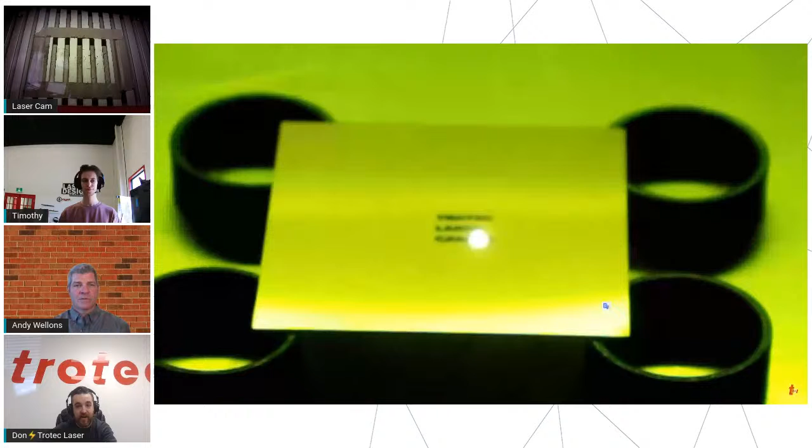But we do also offer the virtual demonstration. So I would encourage you, no matter where you are in the world, to head to troteclaser.com and reach out to your local Trotec and come see us or see us over the internet.

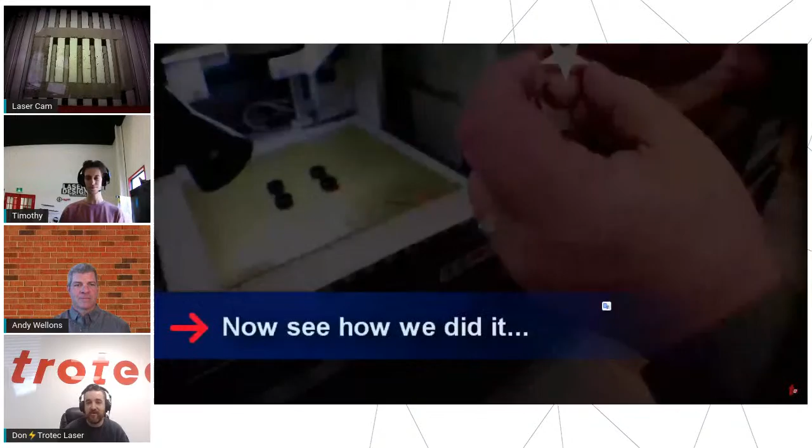One of the best parts about coming down to see us in person, or if you're in the UK, obviously go see Johnny - bring your own files, bring your own materials, and we'd be very happy to do a demonstration of either a Galvo or a Speedy system, or both, to give you the opportunity to see one of these machines in action. I promise you, it is just as impressive as what Tim has shown here.

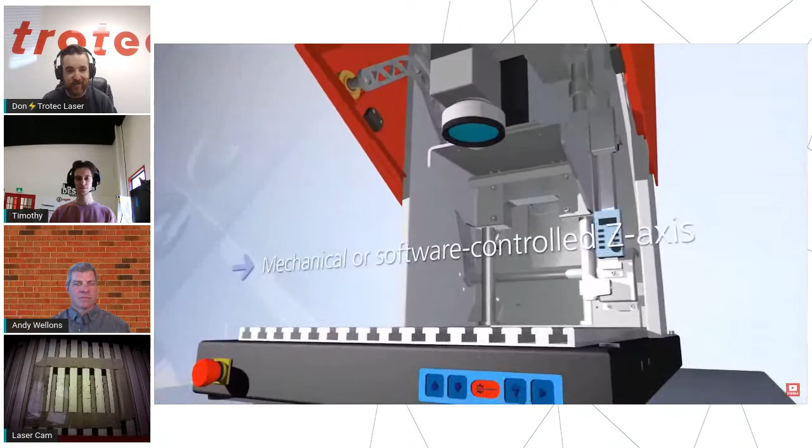Any sort of final thoughts, gentlemen? Tim, I got to say, thank you for running us through the software. Anything we missed out on? Anything people should look forward to seeing in the future? The CL Galvos. I think we're not sure when those are coming out, but I'm excited for those too. If you're not familiar with the CL Galvos, they are, in a nutshell, very similar to the Speed Marker Galvos, but with that CO2 laser source. So you have some of that same speed of marking, but with the ability to incorporate the organic materials that a CO2 laser is best suited for.